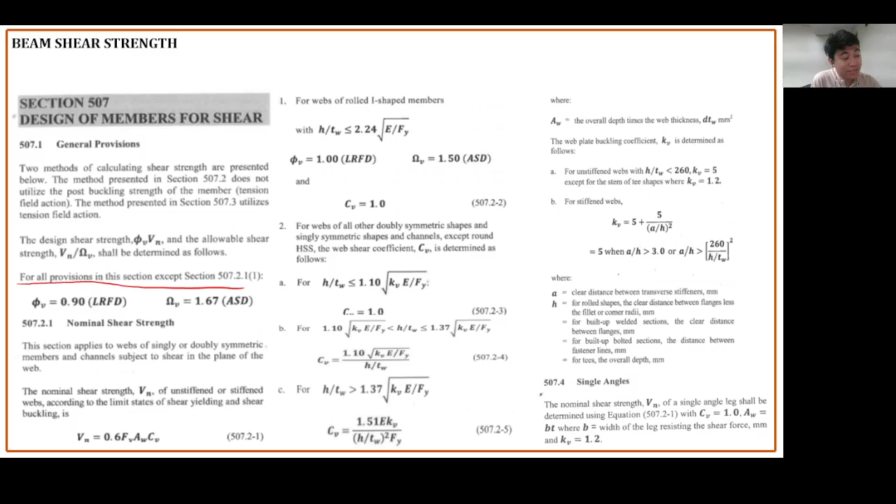For this code, for all provisions in this chapter, except as noted, we are going to use a reduction factor of 0.9 and safety factor of 1.67. Remember, these are the reduction factor and safety factor used for yielding, because there's no rupture here in terms of shear. But you can only use this for all parts of the chapter except 507.2, if you satisfy this condition.

507.2.1 and 1 - what does it mean? 507.2 consists of 1 and 2, so you cannot use this if 1 was satisfied. If we satisfy this condition, h over tw less than 2.24 square root of E over Fy, for W section or I-shaped members, you have to use a reduction factor of 1.0 and 1.5 for ASD.

So that is the reduction factor and the safety factor. For all sections, use 0.9 and 1.67, but if you satisfy this for W section, use 1.0 and 1.5. But how about the nominal capacity? For the nominal, we are going to use this formula.

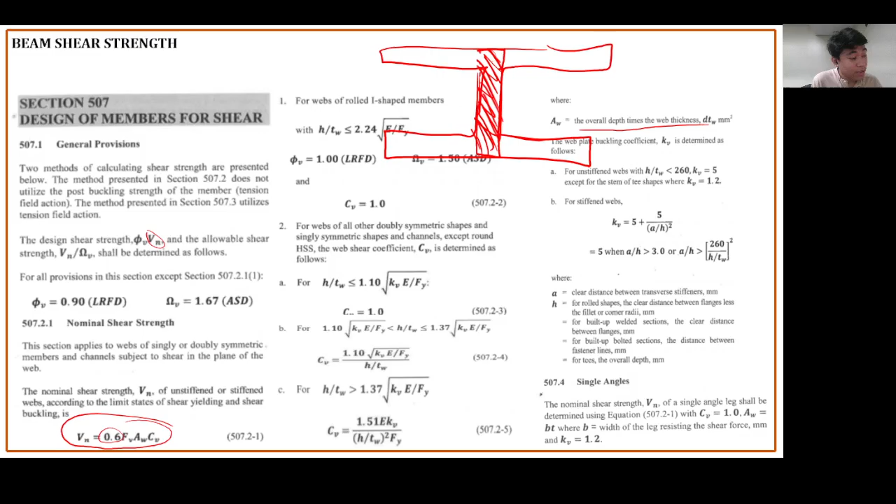And we have here Cv. So what is Cv? If you satisfy this condition, Cv is 1.0. Now for number 2, Cv may vary depending on the value of h over tw. This is applicable for all other doubly symmetric shapes. For h over tw less than 1.10, you have Kv, E over Fy, and so forth.

We will try to see this later as we solve some problems. So you just compare h over tw and then you have Cv. We will explain later the different values of Kv.

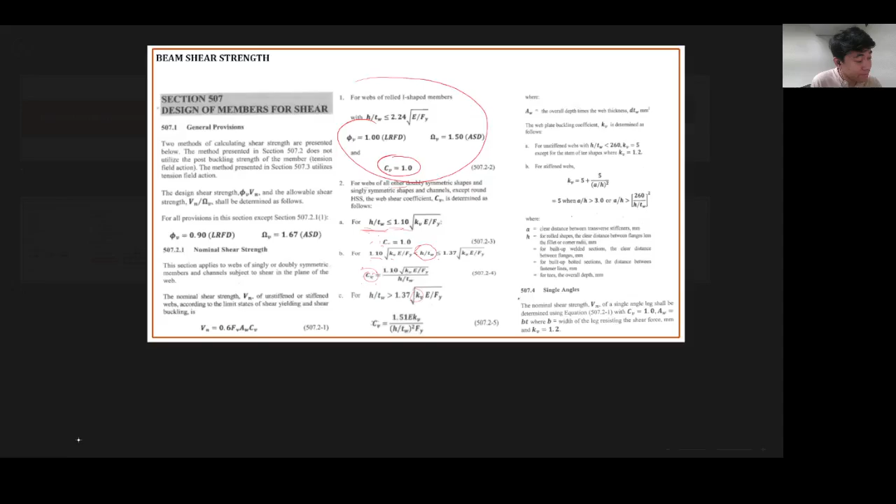Let's try to solve problem number 1. Determine the available shear strength and adequacy of ASTM A992, with Fy of 345. We're going to use section properties which is W610 by 92. The section properties given are the flange thickness, tw, and kdes.

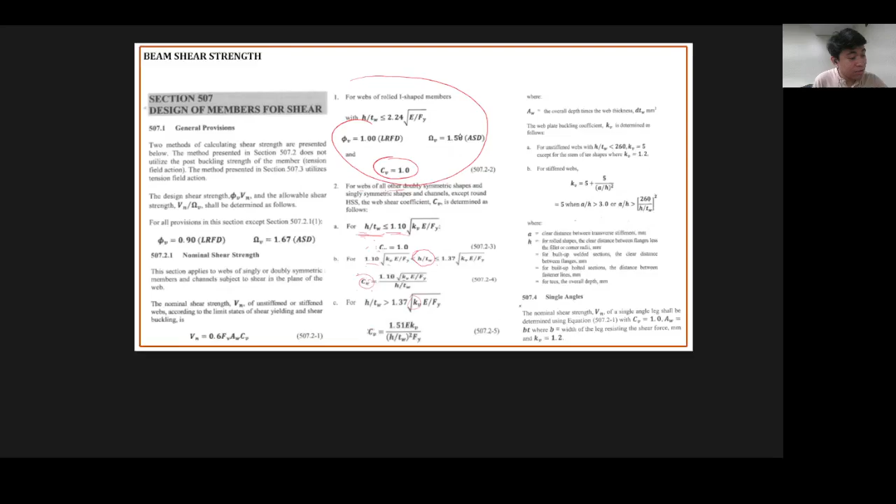The first thing to do is to check the value of h over tw. So what is h? For a rolled section, if we read the NSCP, h is the clear distance between the flanges less the fillet or corner radii. That is for rolled shapes, or from the AISC database. So there is somehow a radius here, at the flanges.

Fillet - it's not really straight here. So how do we calculate the h? To calculate h, it's the clear distance between the flanges less the fillet or corner radii.

So that means this is your h. How do we calculate this distance? To calculate that, actually that is kdes, that is for rolled shape. However, for built-up section, for clear distance, of course it's not the same.

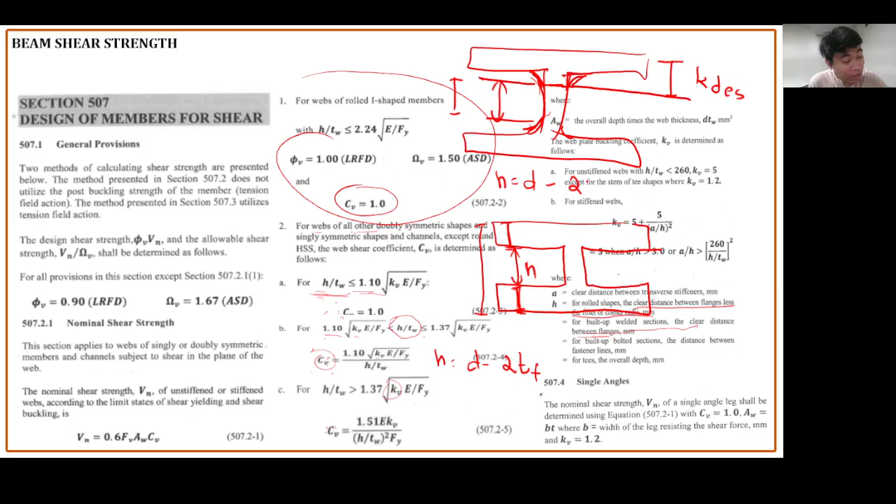It doesn't consist any radii here, so therefore your h is just like this. You have the total depth, you just less the 2k, or rather the 2t times the thickness of the flange. To calculate the h is just d minus 2 times the thickness of the flange if that is a built-up shape. So to calculate the h, that is d, overall depth, minus 2 times k des. That's how we calculate the value of h for built up and for rolled section.

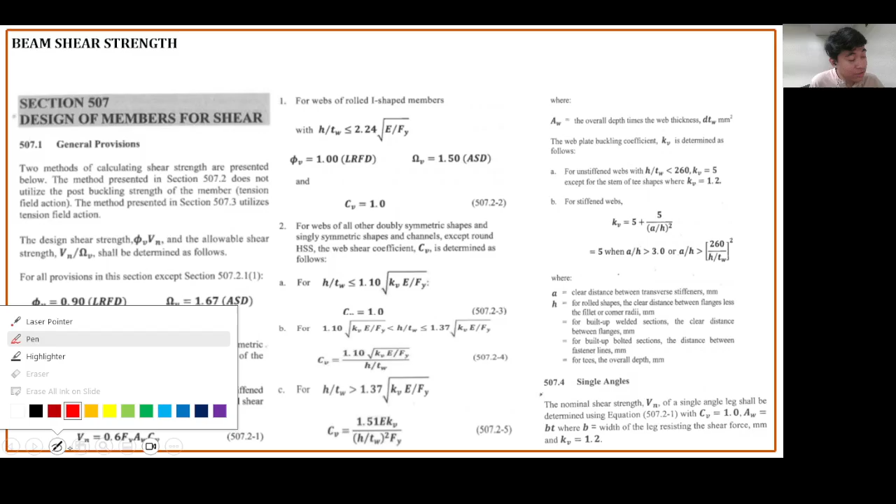Since the given here is from AISC database, W610 by 92, this is a rolled section. So to solve the h, that is d minus 2 k des. So the total overall depth 602 minus 2 times the k des. That is equal to 546.6 millimeters.

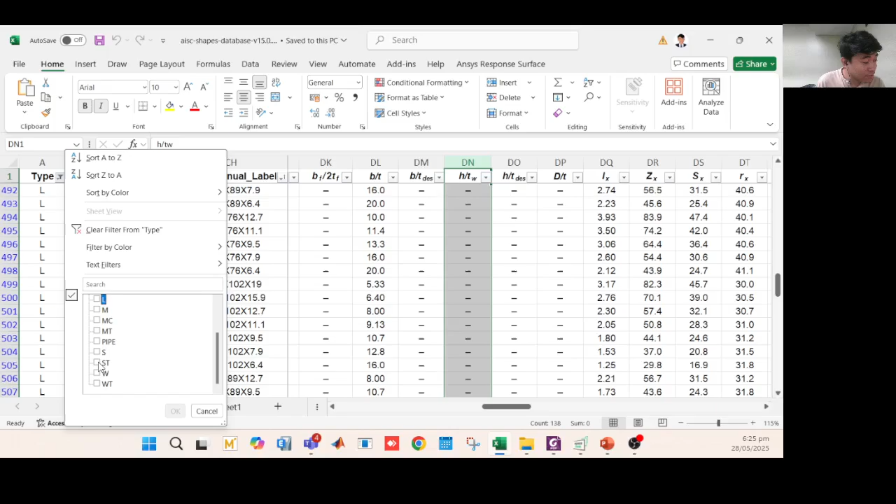Let's solve the H over TW. H over TW is 546.6 over 10.9. Anyway, this value can also be found at the AISC. If we see this portion, it already consists of H over TW for W section. There is somehow a discrepancy with the value of H over TW from the database versus when you calculate it manually.

Very small discrepancy. But for this topic, we will just use the calculated H over TW instead of using the H over TW written here. If that is already given on the problem, just use the actual value given as the value of h over tw.

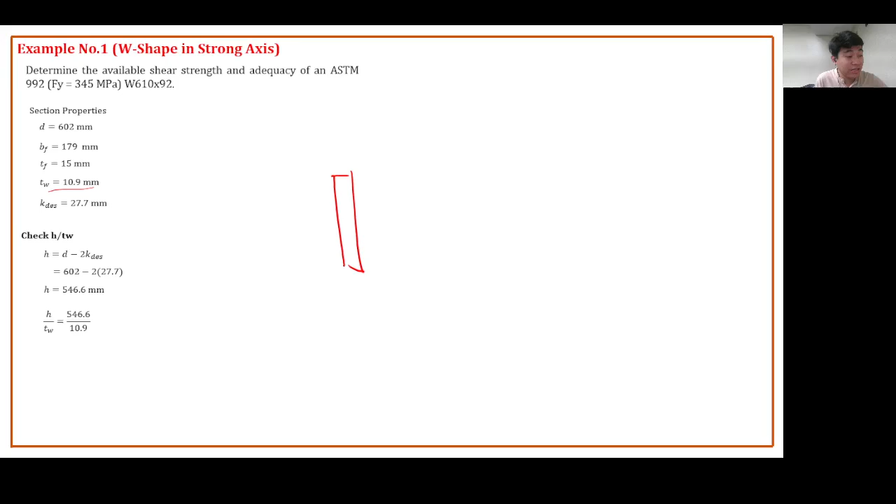So h over tw, that is the thickness of the web. Actually we're just getting how slender is the web, because we get the h divided by the thickness of the web. So you're just getting how slender is your web, the slenderness of the web.

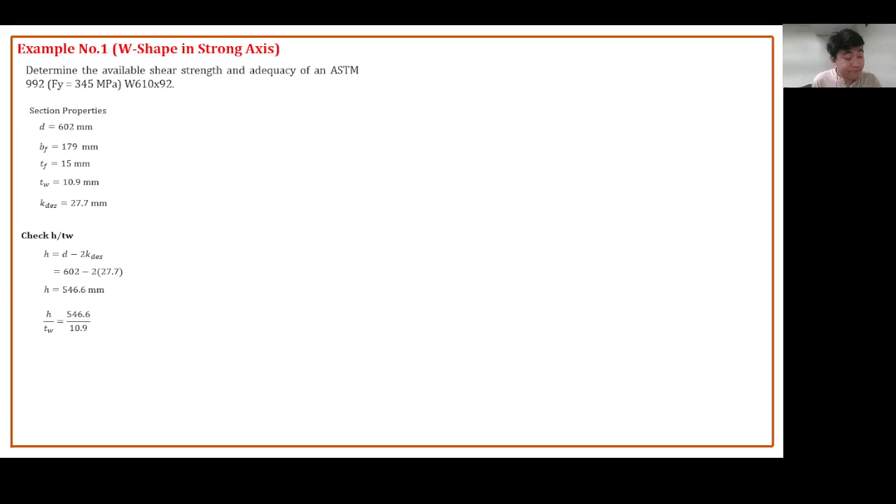Then you are going to compare this. You have to check if you satisfy this condition: if h over tw is less than or equal to 2.24 square root of e over fy. If that was satisfied, you have to use the following: CV is 1.0, reduction factor is 1.0, and this is also 1.0.

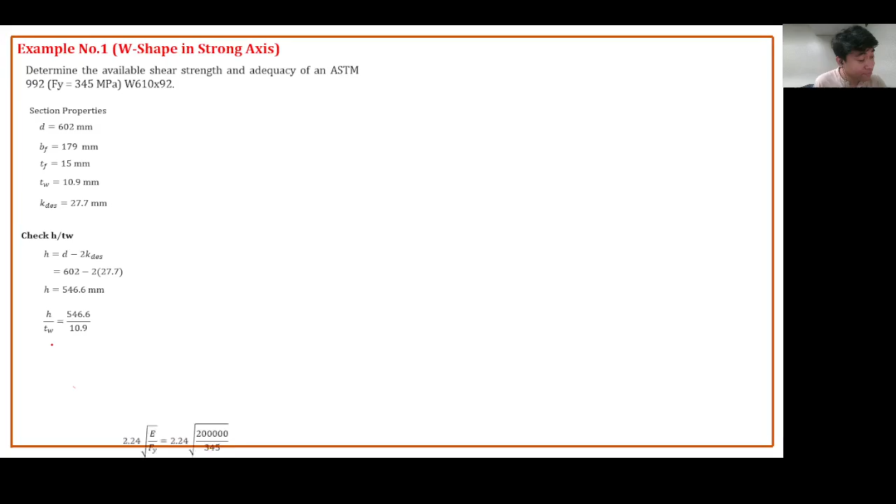Let's see if we satisfy that condition: 2.24 square root of e over fy. Let's solve this. E is 200,000 megapascal, and for A992 steel, ASTM A992, the Fy is 345 megapascal, equivalent to grade 50 KSI. Solving this value, this is 50.147 and this is 53.933. That is less than, so we satisfy this condition. This is only applicable for rolled I-shape.

So you have to check this. If you don't use rolled I-shape, let's say channel, angles, you don't have to use this formula, you don't have to check this. Just proceed with this one. This is applicable for other doubly symmetric and single symmetric shapes.

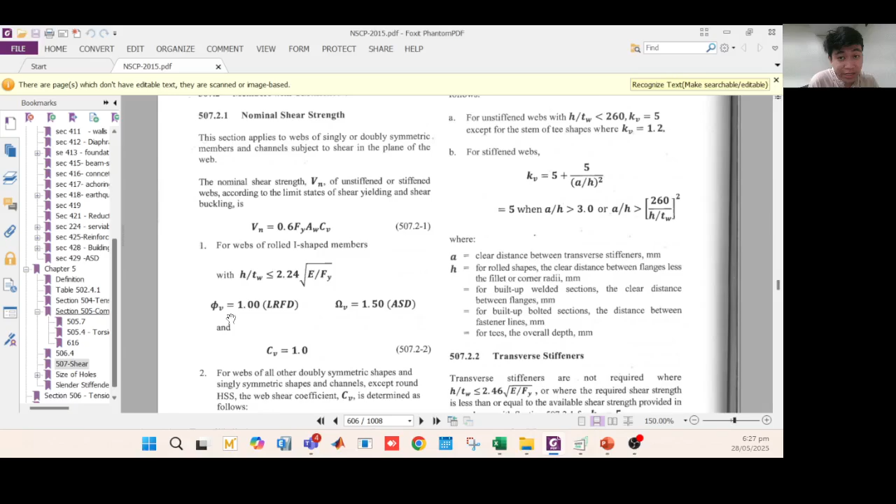Now if you satisfy this condition, this is our reduction factor for LRFD, this is for ASD, and this is for CV that will be used for calculating the VN. Thus we satisfy, because it's less than. So we have the reduction factor for LRFD, safety factor for ASD, and then the value of C.

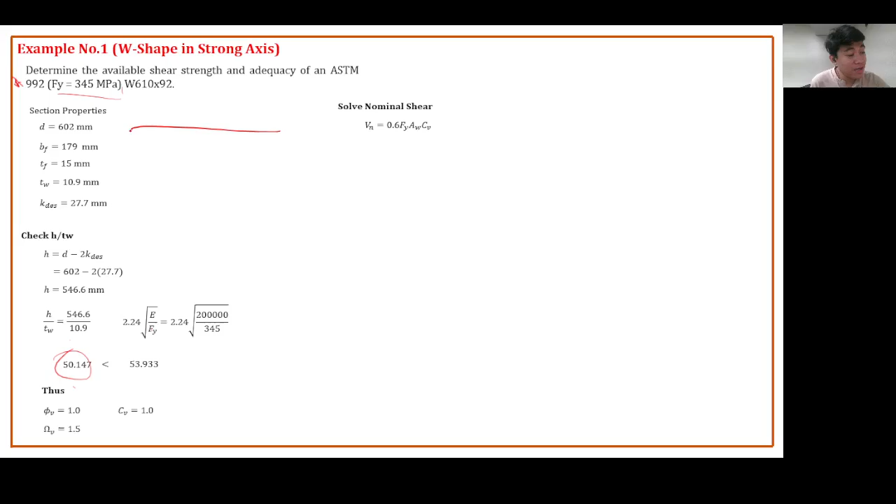So we can now calculate the nominal shear strength. The nominal is 0.6 FY AW times CV. Again, AW is the area of this one, the full depth times the thickness of the web. Let's get the area of the web.

So thickness times the total depth, 602 times the thickness of the web, 10.9. So the area for shear is 6561.8. Let's substitute, CV is 1.0. So 0.6 FY AW, then 1 times 10 raised to negative 3. So the answer is 1358.293 kilonewtons.

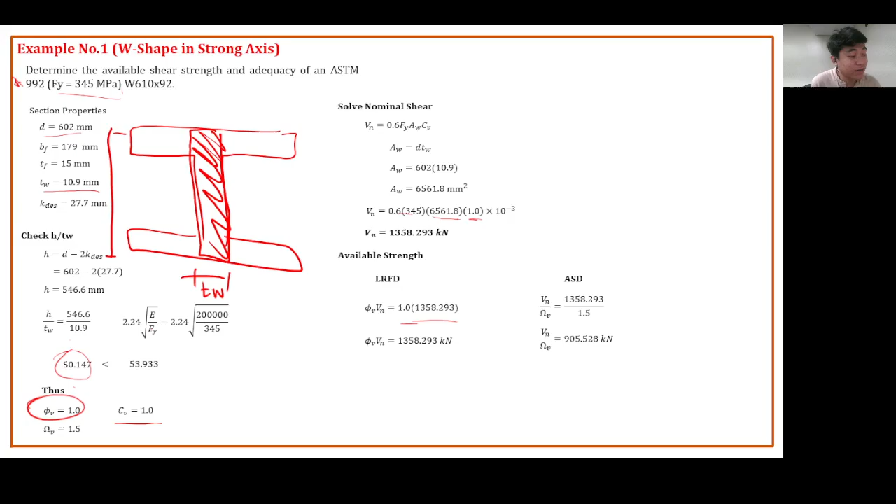Now let's calculate the available strength. The available strength, or capacity, times the reduction factor for LRFD, and for ASD you just divide it by the safety factor. We multiply by the reduction factor, we'll be using 1.0, so this is 1358.293, the answer is the same. For the ASD, you divide it by the safety factor of 1.5. So these are your answers.

Okay, so problem number 2, next problem.